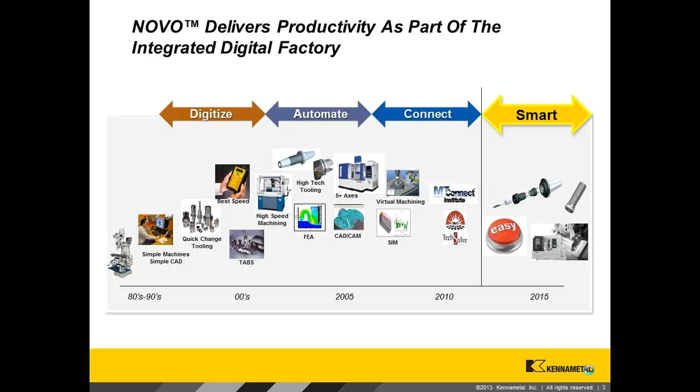But the real challenge for the next 10 years in our industry is, how do you work smartly to connect all these things? You know, this is the promise to fill this technical gap, right? We know there's not enough technical people. The environment's become even increasingly complex, creating even more gaps. So how do you smartly connect all this technology together for productivity? This is really the promise of the integration of the digital factory of the future, but also the challenge. And we believe our play in NOVO can drive this.

So, for example, in NOVO, by digitizing our engagement with our customer, we can change how our productivity is delivered. So in the past, our application engineers would work in the machining environment at the spindle, optimizing one operation, one spindle at a time, bringing their knowledge, which is only connected to about 3% of the cost of goods sold, but enabling a tremendous amount of productivity in terms of manufacturing equipment utilization and labor and overhead savings. So that was done very manual and very disconnected, day by day, spindle by spindle, operation by operation.

Well, now with digitizing that knowledge and that input, we can help the process planner or the guy in the CAD-CAM area to integrate this knowledge up front, so you get the productivity up front. It's much more deployable through the whole process plan, through the program, through the simulation, and you really get the productivity up front in the art-to-part process. So this is just one way that we envision our digital transformation from NOVO at Kennametal enabling productivity in the shop of the future.

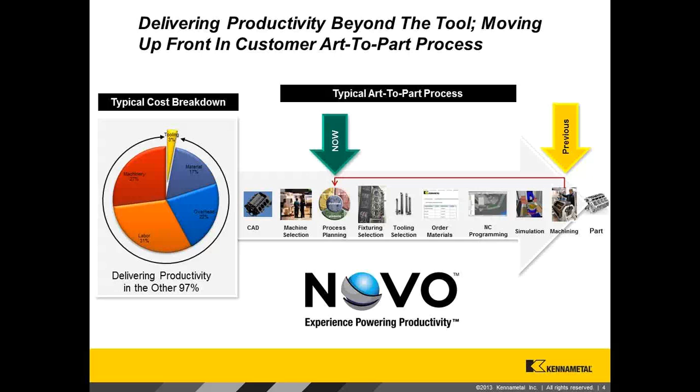So let me give you an example. Here's a real life example someone sent to me of what they've done with our new PC and tablet application. It illustrates this.

You know, the drawing on the left is a typical day in a process planner's life. You hand them a pump, if you will. There's tons of operations and steps to break this down into machining strategies and cutting tool solutions. And it's typically a very time-intensive process, searching through catalogs, looking for data, trying to integrate it into the process plan. And it's basically done through manual collaboration or just basic tribal knowledge. What do I know? What has worked before?

So one of our application teams sent this in and said, you know, before we had the new PC and tablet application, NOVO, this would have taken a 4-man team probably about 2 days to break this component down into steps, cutting tool recommendations, and get all the feed and speed information. And we likely would have had older technology because that was our tribal technology. We wouldn't have had time to look up any spare parts, and if the customer needed the data and models to program the part, we'd have had to go and do that as well afterwards.

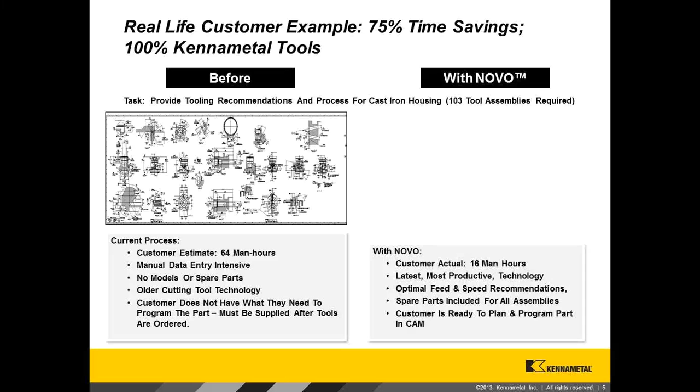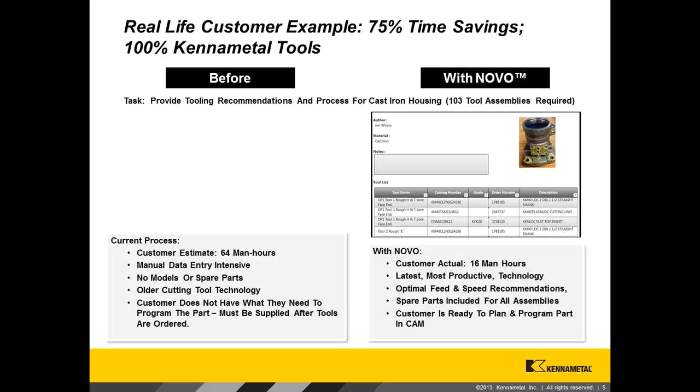Well, with NOVO, the free PC application download, they were able to do this same operation setup in about 4 hours with a 4-man team. They have the latest, most productive technology, optimized feed and speed information, all the spare parts, all the assemblies, and the models. So they have everything they need to program this in their CAM in the most productive way available on the market today. So this is just one of the examples of how new digital tools can help us be more efficient, more productive, and really streamline our operations to fill that technical gap in the market.

So I'm going to walk through a live demo of our PC and tablet applications, which we've launched over the last 6 months. I would tell you that that's just the beginning. What you will see coming in the spring of 2014 is the integration with the CAM environment and also tool management. So how do you take the labor intensity out of moving data? How do you error-proof moving data around your shop? Because let's be honest, the data around the cutting tool is as valuable, if not more valuable, in these new fancy digital CNC machines, 5-axis machines, as the cutting tool itself.

And finally, moving on into the future, if you read about Bosch's Industry 4.0 or General Electric's Industrial Internet, this is really the promise of the future of manufacturing. So I hope you enjoyed a little background about why Kennametal has decided to embark on this digital transformation, and a little bit about what NOVO is all about.

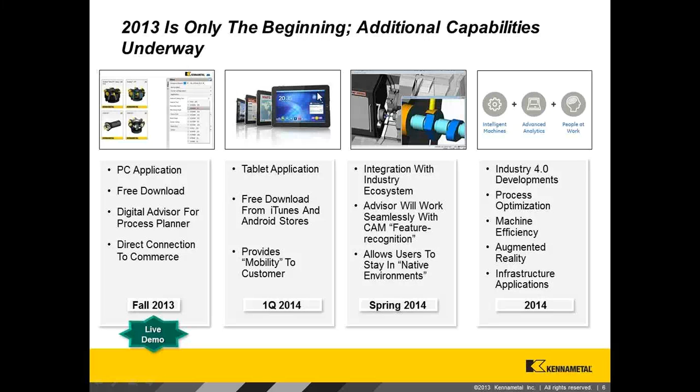Now I'm going to demonstrate for you our first digital tool in our NOVO program. It's a free PC and tablet application which you can download for free from www.kennametal.com/NOVO. If you give me a second, I will open up the application. So it's a desktop or a tablet download. You have an icon on your desktop or your tablet, and when you open it up, you're going to notice one of the first unique things about our application, which makes it a bit different. If you give it a second here, it runs a little slower when I've got the live meeting software on here.

So when I log into the system, it knows that it's me. So how does it know that it's me, Chris Merlin? Well, NOVO is powered by the Machining Cloud company. Their vision is to be the data interchange of the machining world, having publishers and consumers. So this application is a consumer of cutting tool data, so it allows the user to access cutting tool data and models. But you could imagine you could integrate publishers of machine tools and other suppliers in here for an integrated tool for the user to use.

So it knows it's me, it's cloud enabled, and what that means is it allows me to set up a user account which uniquely identifies me. So why would I want to do this? Well, the benefit is as I use this to create my tooling solutions, I can save them in jobs, if you will. Think about these as tool lists. So I can save them as jobs, and they'll be saved in my job management here for me to access from any device anytime I want, for future use or sharing, collaboration with people.

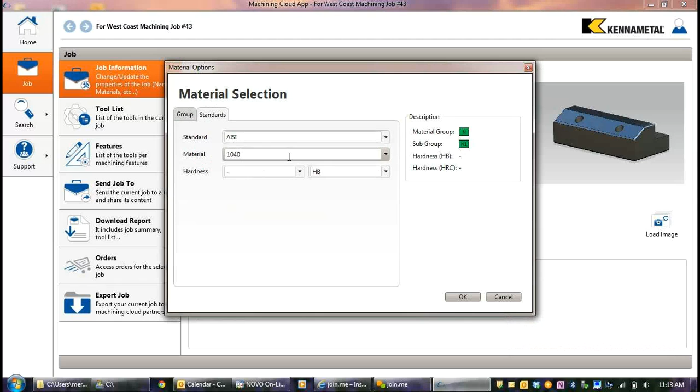So an advisor is, before I get into that, by the way, I've identified that this is 1040 steel. It has a huge, robust library of over 3,000 or 4,000 materials that you can search within different systems. In this case, it's 1040 steel, AISI that I'm searching for. And what this does when you pick the workpiece material is it already speeds your search because it refines the search for tools that are best suited for this particular material that you're going to machine that day.

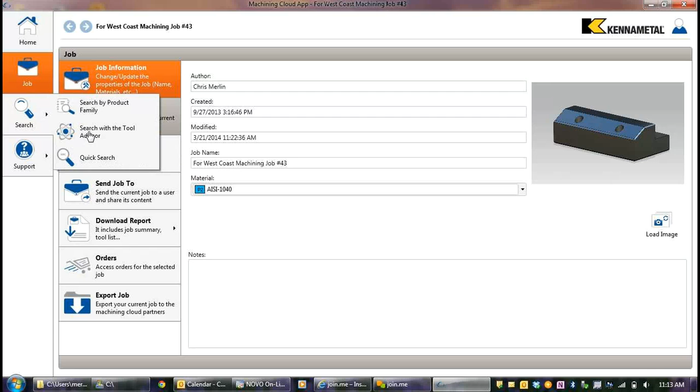So I've identified 1040 steel. I want to work on this hole on the bottom right-hand side of the screen, and now I go into the advisor. So the advisor is, I know what feature I want to make. Help me make it. So this is obviously a hole making operation, and it has a really robust library of preloaded templates.

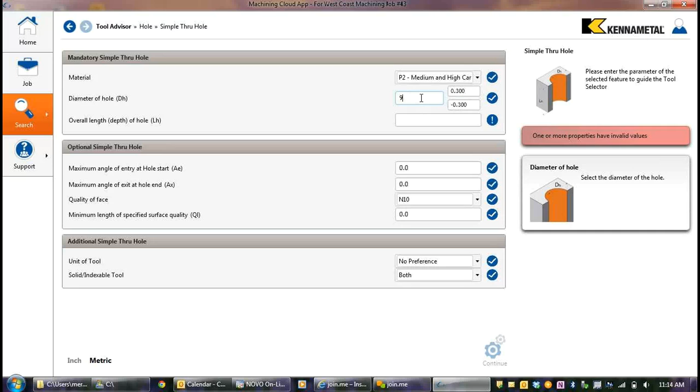I pick the through hole, and now it only requires 3 pieces of information to give the most productive solution available from Kennametal today. In this case, it's preloaded that it's a P2 machinability because I've told it it's 1040 steel. Now I'll tell it's a 9mm hole. I can input in metric or inch here. I'm going to input in metric, so +0.3 -0, and the overall depth is 50 millimeters.

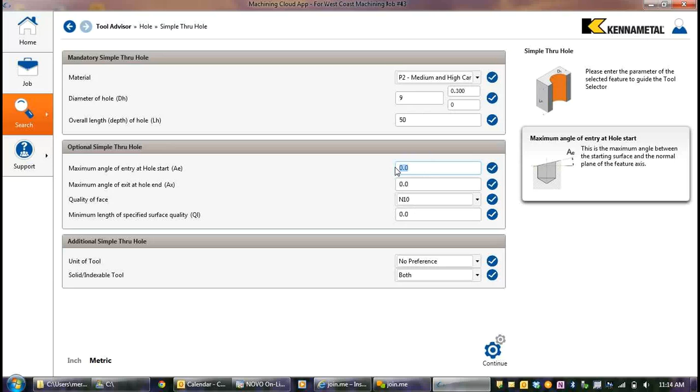Now the other thing that it allows me to do is add additional things about the operation to further refine it. So I can optionally tell it about the 10-degree angle on the face of the workpiece. And it gives me the options to refine my output. So if I want only inch or metric output, in this case I'll go with metric. And if I want solid or indexable tools, fine. I'm going to run it wide open for my choice of metric tools.

Now when I hit this, here's the second thing that really separates NOVO from other selection type softwares. It goes into the machining strategy. So this is something that allows a process planner, a CAM programmer, to identify the strategy that they're most comfortable with based on their operating environment, machine experience, and so forth. And it also educates them about other machining strategies that could be available.

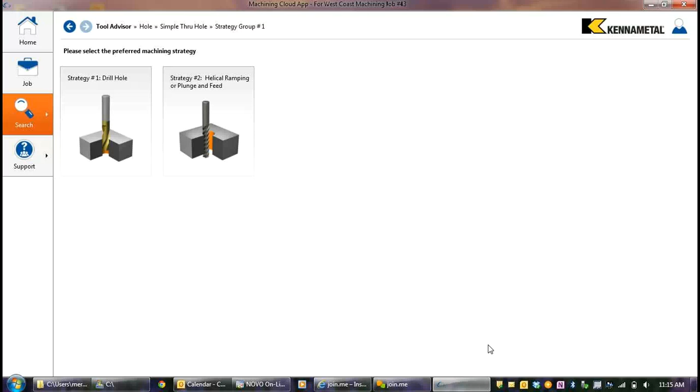So typically process planners get into a mode like we all do of tribal knowledge, do what I do. And it's only because it's a bit tedious to explore other options, but in this case, it gave him another option he might not have considered. Now, I think the option that I'm most familiar with is just the drilling operation. So I picked that strategy, which again is very closely connected to how a CAM process planner thinks.

And now it's going through the database of 55,000 standard Kennametal tools live from the cloud. So this is coming live from Kennametal's business system. So if there's something better tomorrow, it's going to be updated. And it gives the best, most productive solution available in Kennametal based on a powerful rules engine, which is like having a tooling application engineer sitting by your side. A couple things you'll notice, though, that's really unique.

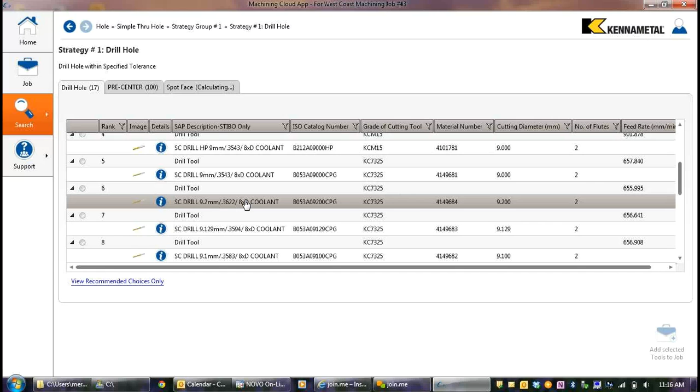Not only does it give you the best solution, but it allows you to view alternate solutions. So maybe you know that replaceable tip drill is the most productive, cost-effective solution, but you also know you only have solid carbide drills in your inventory. You can check for that particular solid carbide drill and compare it versus the other solution that it's recommended.

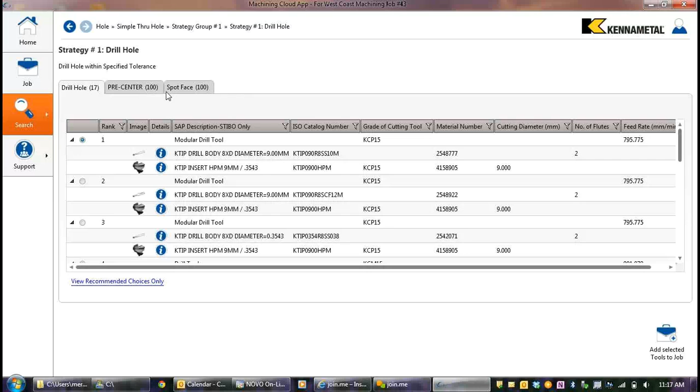The other thing that really makes NOVO powerful is that it isn't just giving a tool to drill that hole. It's giving a multi-tool sequence. So it's giving a roughing and a finishing operation. In fact, in this case, it's two roughing operations, right? It's identified you have challenging preconditions. One is you have a long L to D ratio, which means that you have to use a pre-center drill.

So this is one of these tips that a cutting tool expert knows, or it's back on page 4,000 of our catalog. But it's not something that necessarily a CAD-CAM programmer is thinking about when doing this. And it's recognized that it has that 10-degree angle on the face, so it says, hey, you better deal with that angle by spot facing it first, so you can have a clean entry for your drill.

So this is something that not only does it give you the most productive tooling solution for a single operation, but NOVO identifies according to your operation what the best three-tool sequence is, or the best roughing and finishing. So it's really going a step ahead in identifying not only the machining strategy, but the tooling sequence to do.

So now I got this great solution, and now I can just save it to my job. And by saving it to the job, this gives me a lot of power in how to share the job with the rest of the folks in my shop. Now, why would I want to do this? Well, first and foremost, typically shops are broken into engineering areas and purchasing areas. So as a CAD-CAM programmer or a manufacturing engineer, I'm typically not enabled to purchase, but I need an easy way to share to make my purchasing agent's job easy, or my distributor.

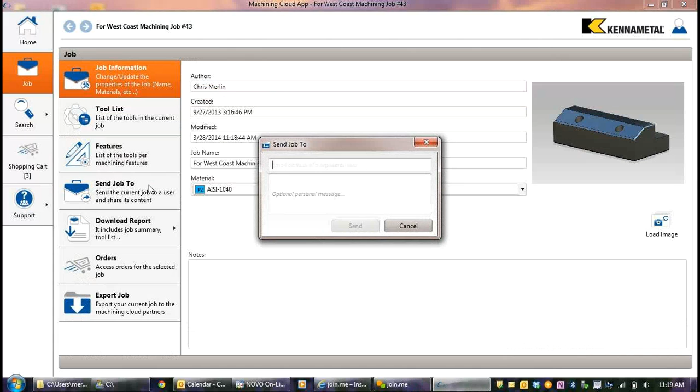The other thing it allows you to do is to download a report. So the report is such that, think of it as kind of an analog way to share the job. So you have a couple challenges when you're working in CAD-CAM. One is getting the data into your system. So having an Excel spreadsheet is very, very helpful for copy and pasting into things. The other thing is, how do I share a job, or how do I communicate this job to maybe a guy on the floor who's not sitting behind a computer all day long?

So what you'll see in a minute is it's generating an Excel report. It's got an overview sheet on the front, which lists all the tool assemblies that you have for that particular operation, or for that particular job. And it's also giving an individual sheet on each operation in that particular job.

Now, if you give me a second here, I apologize for the delay. My Excel seems to be running a bit slow.

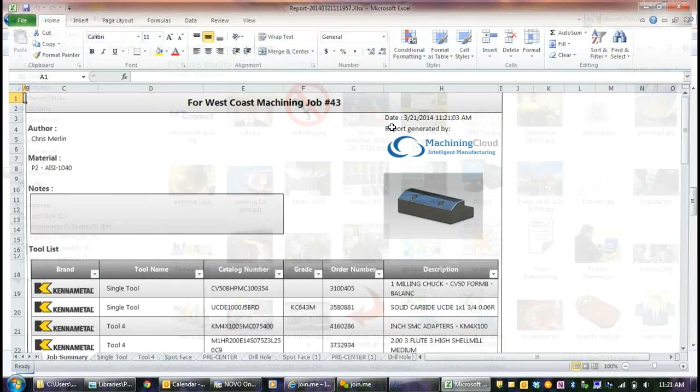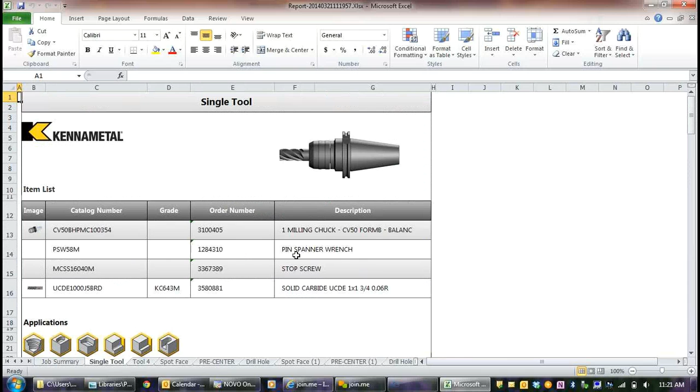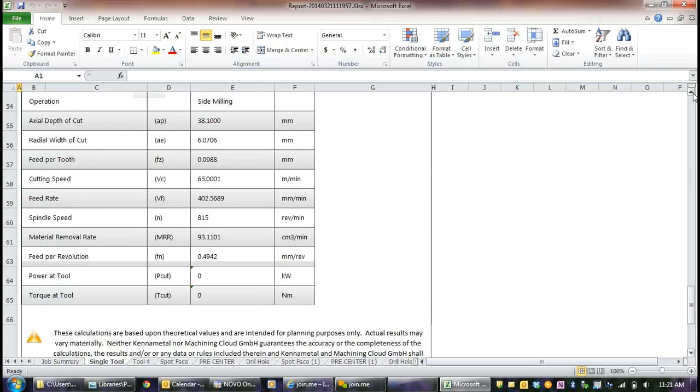So as you see here, it's got an overview page, each of the operations I've selected for this particular thing, all the material masters, all the grades, and each particular assembly that I've selected. So one of the big headache points is searching for spare parts. This one's got the complete picture of the assembly, the holder, the spare parts, the cutter, all the 2D dimensional information, as well as the feed and speed information in here. So it's very, very handy for sharing in an analog way.

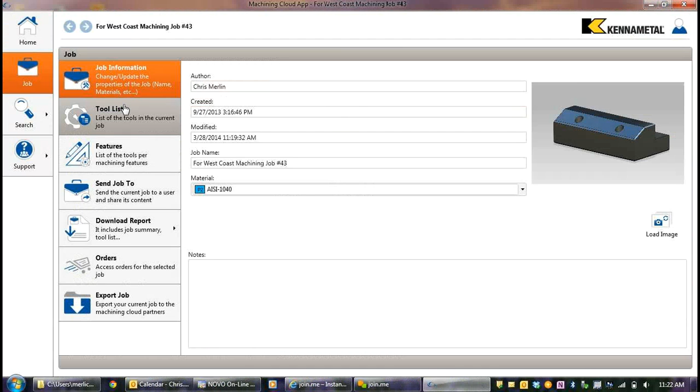Next thing you can do in NOVO, once you've got your job here, is you can open up an individual tool assembly. So let's say I go into my tool list and I picked this particular tool for this operation. Spot face there. I can open it up, and now I can do some important things with this.

I need to adapt it to the machine I'm going to use it on. So here I've got an HSK 50 holder on this particular assembly. What I can do is let's say I decide I need to use that on my KM machine. I can remove that, and now I can easily go back into this tool cutter and add an adapter.

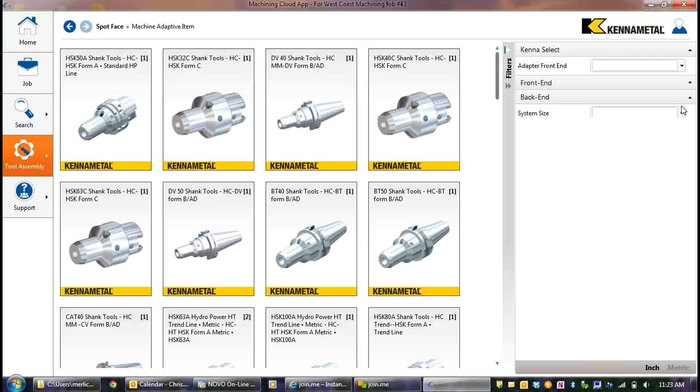Now, all of our items in NOVO are mapped with fits with and works with conventions. So as you know, there's things that fit together but don't work together, like a Weldon shank and a hydraulic chuck. But this really error-proofs your selection of the holder, as well as speeds it up, because instead of going into a 1,000-page systems book, now you've got only the holders that are guaranteed to fit and work with this particular holder. You can pick on one.

If it's not something that you stock, you can check to see if it's available at your local Kennametal warehouse, which is also very handy. This one's in Cleveland, so I'm going to add it to my assembly. And for the CAD/CAM programmer, not only is this very convenient for changing which machine you want to use it on to do the programming, but it gives him the 3D assembly model to do the simulation and programming. This is really what he needs.

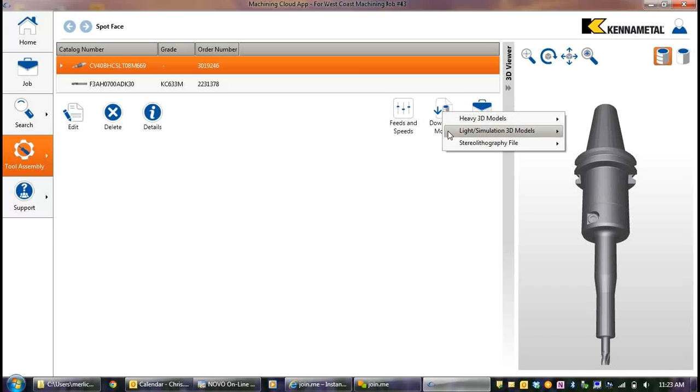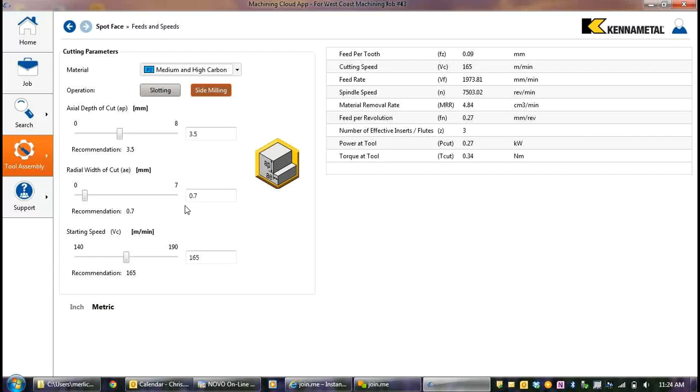So he can download the model into a standard STEP file. This is a live model he can use for programming, and he can go in and dynamically play with the feeds and speeds to feed into his system, and it'll be saved with this particular tool assembly. So it's very powerful for the CAD/CAM programmer as far as programming the machine, getting the data, getting the models, and also switching the process as you move downstream.

So I'm just going to show you a couple other features of NOVO, then I'm going to open up for questions. It does also have a quick search function, so a Google-type search, a Boolean search, if you will. So I could search for GOdrill. If I know a name of a product line, I can search for that.

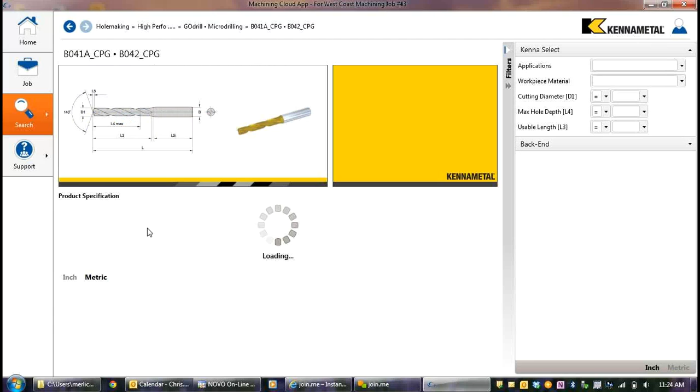Or if I have a material master, say maybe I have a material master in my tool crib and I don't remember what the feeds and speeds are as recommended by Kennametal. I could easily type a material master in here, go in, open that particular material master up, add it to my job, and then go in and easily check the feeds and speeds for the particular material I've got to drill that day.

The other thing that you can do with NOVO, which is pretty cool, is you can search by family; it's kind of an electronic catalog on steroids. So you go into the search by family, and you could go into the milling tools, or go into the hole-making tools perhaps. And I've already got it filtered on P2, which is the original material in my workpiece.

But let's say I know I want it to work in P2, but I also do a lot of titanium drilling. So I want only drills that work in P2 and in titanium. So now I click on the high temp alloys and P2. It stacks the restrictions on top of each other. Now I'm down to the set of tools that work for those two particular materials. I can put in my cutting diameter.

Typical, put in 1/4 inch. So put in a 1/4 inch drill. Put in my depth of cut. I'll go with this one here, inch and a quarter. And now I've gone in 3 clicks.

I found the one drill in Kennametal's portfolio which will work in both steel or both high temp alloys and P2. It's a 1/4 inch and can drill 1.3 inches deep. So it's pretty effective in that way.

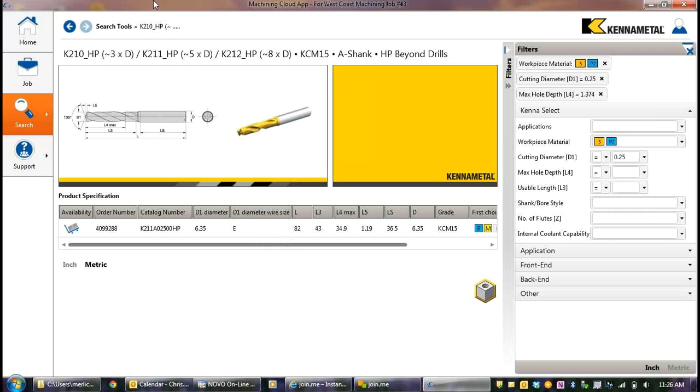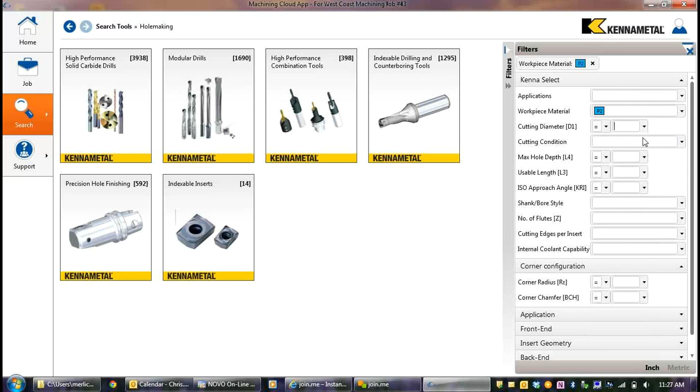The other kind of use case is maybe you got a job to do tomorrow, and you don't have a drill in stock. You could look for all the, say, 1/4 inch diameter drills within Kennametal that can drill P2 and high temp alloys.

And now you could easily go down, so you're down to about 10, 12 of these drills. You can easily go in and find which one might be in stock in Cleveland and add it to your cart, order it, or call your local distributor and order it.

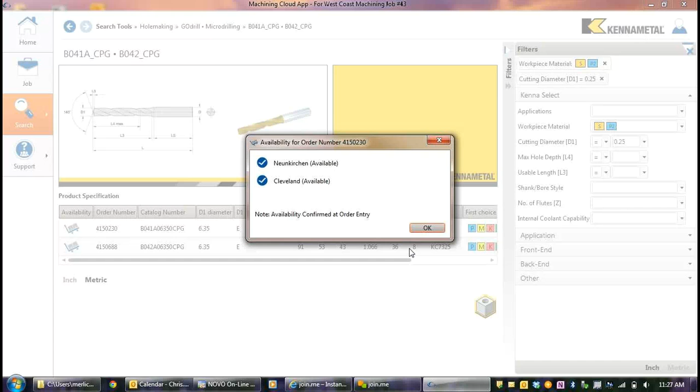So in the last 20 minutes or so, hopefully I've showed you what makes NOVO different from a lot of the other products on the market. It's cloud enabled, which means the data is live from Kennametal, always up to date, always the latest and greatest solutions from Kennametal. You have live inventory checking, easy connection to the purchasing system to make life easy for the guy picking the tools as well as ordering the tools.

Certainly, the job functionality is very, very powerful for collaboration. And we've also got the live assembly building, getting the models and data to program your parts. And it's just a lot of power in the new PC and tablet application from the NOVO program. I will tell you, this is just the beginning. We have integrations with CAM systems coming, integrations with tool management systems. So I hope you're as excited about how we're trying to change the way work gets done.